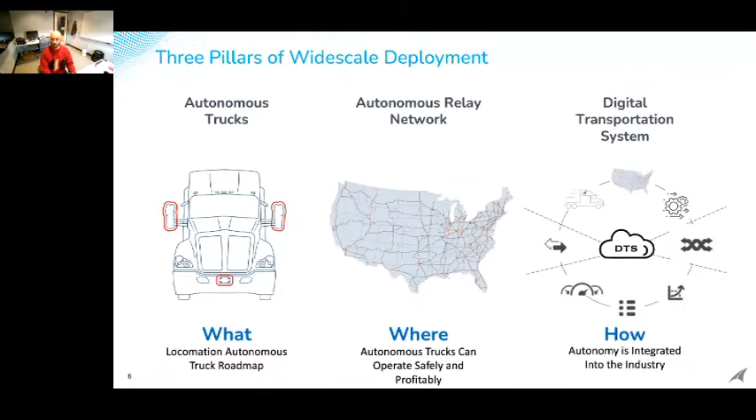Our approach to autonomy is also a little different, and very deliberately so, because we are aware that this is an incredibly difficult problem—by this I mean level 4 solo driverless operation. We decided to take a phased, step-by-step approach, starting with the human-guided autonomy concept, which has two product flavors.

The first one is what we call the autonomous relay convoy. It's a two-truck, two-driver concept, and the drivers in the trucks conveniently and seamlessly handle peripheral problems like pre-trip inspections, paperwork, securing the loads, and driving through surface streets and urban segments, which are the most sophisticated segments for an autonomy solution.

Once the vehicles are on the freeway, the driver of the follower vehicle presses a button on the dash, engages autonomy, and from then on they don't have to sit in the driver's seat. They can clock out, go back to the sleeper berth, and start taking their mandated rest as their cargo keeps moving. The convoy moves in this configuration for the duration of a shift, let's say 7 or 8 hours.

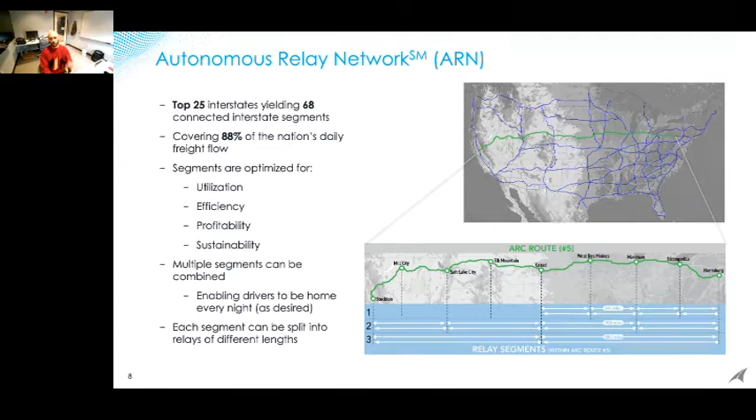In that segmentation and optimization, we looked for maximum asset utilization, maximum efficiency and profitability—not all lanes are created equal—as well as sustainability. With this flexible framework, we can combine multiple segments or divide them further to suit the use cases of different customers. This is the overall autonomous relay network framework that our autonomous vehicles will run on.

Even though I mentioned a step-by-step progression from autonomous relay convoy to drone follower to solo hub-to-hub and dock-to-dock operations, that doesn't mean we'll retire a solution once we advance phases. We won't retire the autonomous relay convoy when we switch to drone follower, or retire convoy concepts when we switch to solo driverless operation. At some point, we envision all four autonomy flavors simultaneously deployed and working throughout the nation, because each has a different use case and different application conditions.

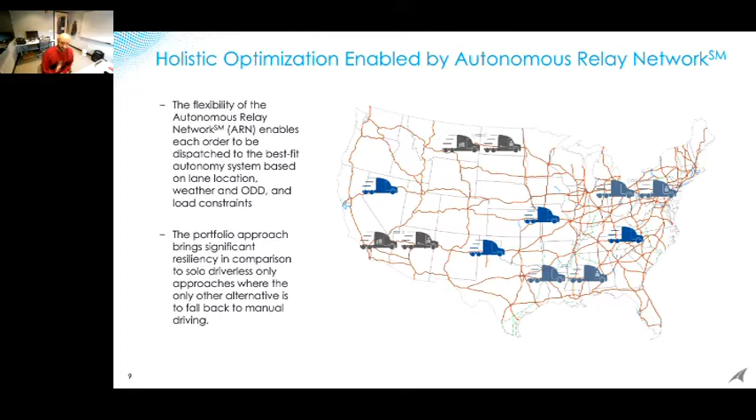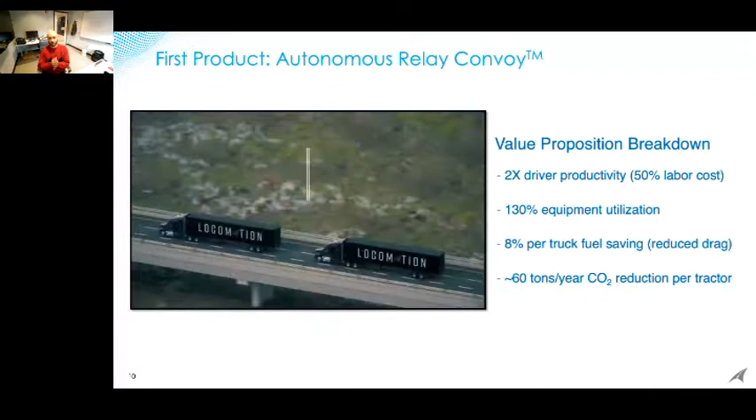With this model, we are increasing existing driver productivity by 2 times, and increasing equipment utilization by almost 130%, because currently only 30% of the time are vehicles doing something useful—otherwise they're either parked or idling, waiting for loads.

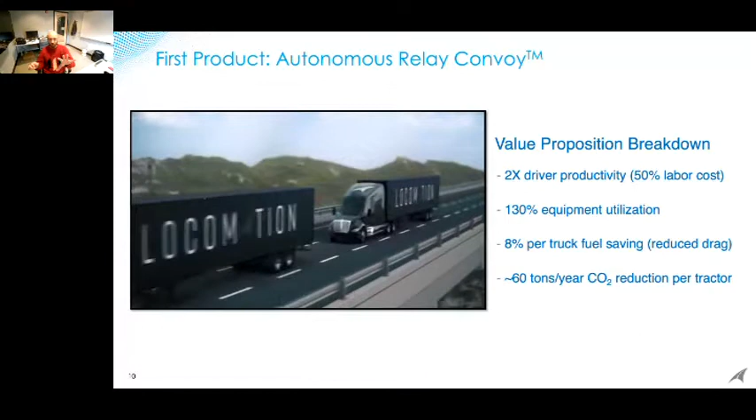So with our overall approach to load planning and route optimization and autonomous vehicle technology combined, we can increase that utilization to about 20 hours a day.

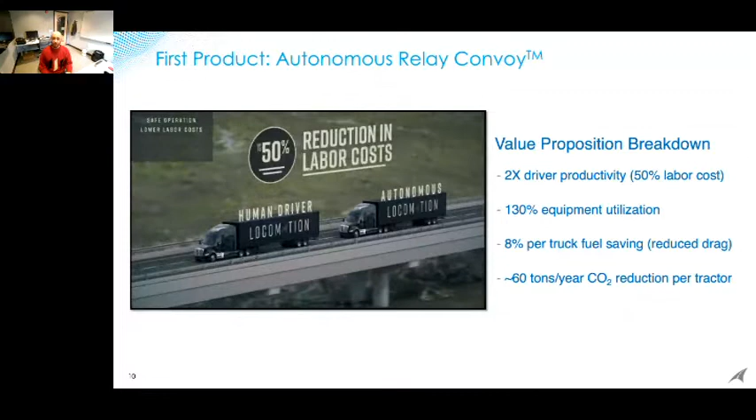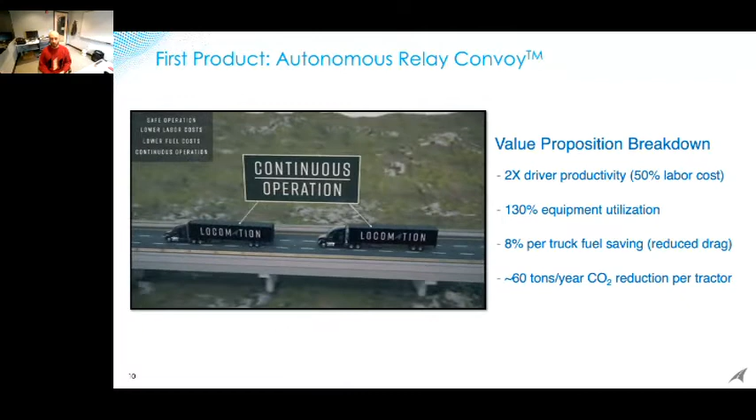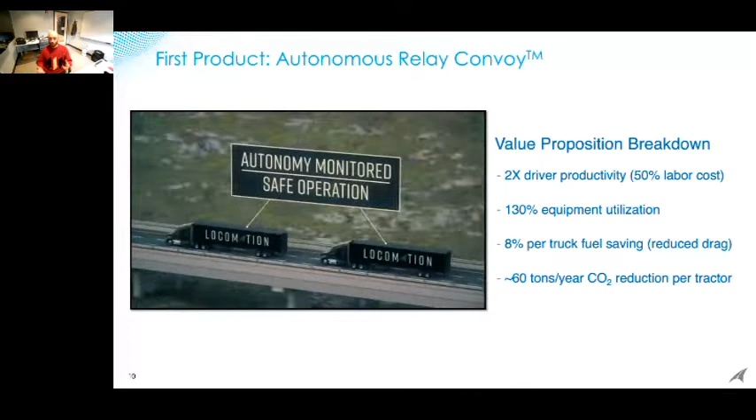And last but not least, because of the fuel savings, we are reducing the carbon footprint significantly. We anticipate each of our tractors, when operating in convoy mode, and also optimized for minimal wait time, minimal idling time, etc., will reduce carbon dioxide emission by 60 metric tons per year per tractor.

And again, from an ESG perspective, we see autonomous relay convoy as the fastest path to net zero emissions. And also, with this approach, we are still keeping humans in the loop, hence addressing the driver shortage problem, essentially utilizing the existing workforce and guiding them with the transition to future technologies, a kind of gradual transition, as well as improving their quality of life.

And also, given that we still have a human in the loop, we believe that it is a safer approach, with the superior cognitive capabilities of humans compared to robots. We will be increasing situational awareness and overall safety of our system.

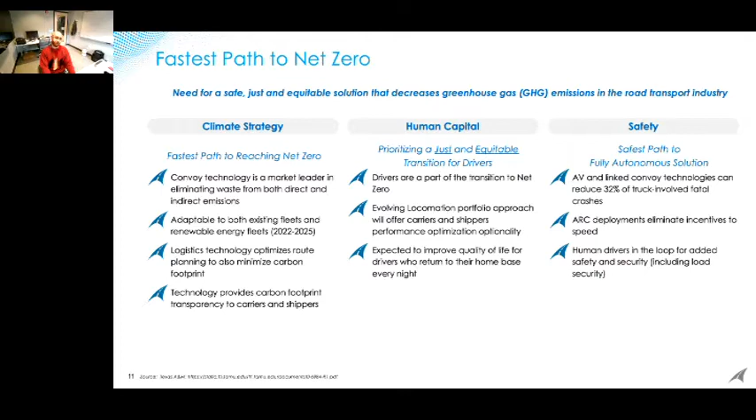So apparently this phased approach, this realistic approach, and the holistic approach to autonomy by Locomation resonated very well in the industry. And as a result, Locomation happened to be the first autonomous vehicle developer to have signed commercial contracts with 2 customers. Our first customer is Wilson Logistics, and we are looking to deploy more than 1,100 trucks, essentially retrofit more than 1,100 of their trucks with our autonomous relay convoy technology, starting deployment by the end of 2022. Our second customer is a local Pittsburgh-based carrier named PGT Trucking, committing to 1,000 trucks initially. This is super exciting, of course.

Also making us very anxious as well, because we have relatively tight timelines that we are looking at.

Of course, it takes a village to make this technology or this deployment a reality. So being aware of that, we are forming very strong partnerships and working closely with industry leaders when it comes to retrofitting our trucks with the relevant and autonomy-ready hardware.

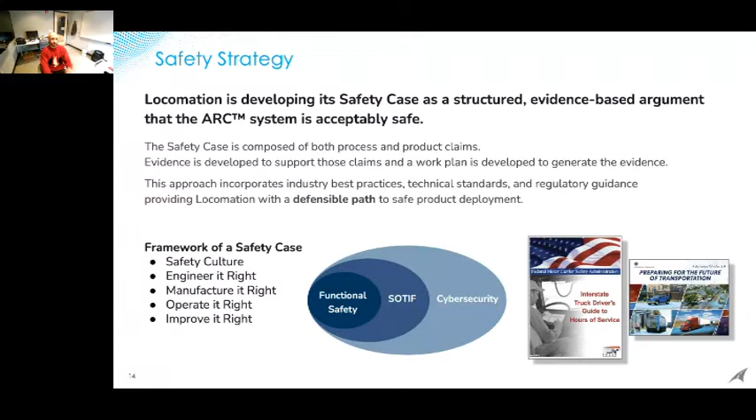For the regulatory strategy, we are working very closely with each of the 50 states, making sure that we comply with all state regulations, including all the permitting and reporting requirements.

There doesn't seem to be any federal barriers to deployment of the ARC system at the moment. We are working closely with FMCSA on that and looking to hear back from them soon. On top of that, we are also working closely with US DOT and state authorities in shaping regulations and laws applicable to commercial deployment of this technology.

So we are engaged in various initiatives like the US DOT Voices Initiative, the Automated Driving System Demonstration Grants, and the 21st Century Truck Partnership Program. We also participate in educational demonstrations, like the smart belt deployment we performed from Pittsburgh to Detroit.

All these actually provide us with feedback, and provide the regulatory agencies with the necessary feedback to craft their narratives and essentially prepare the landscape for this technology.

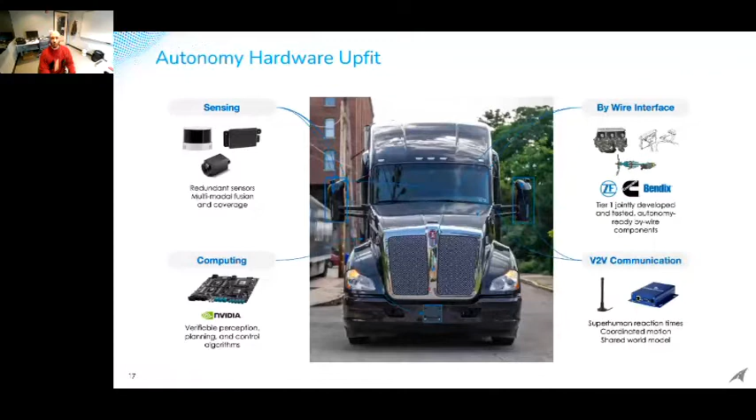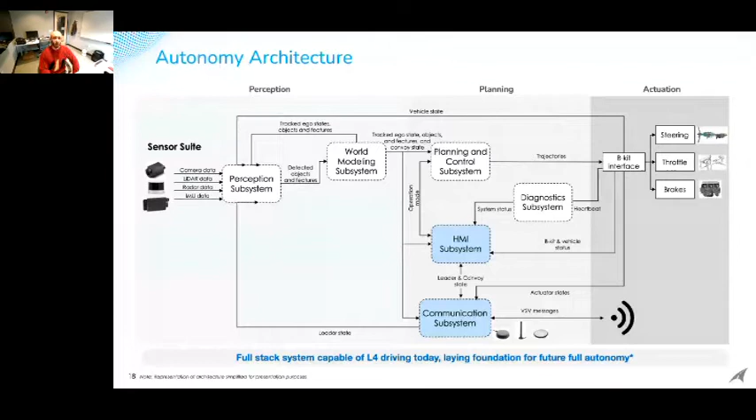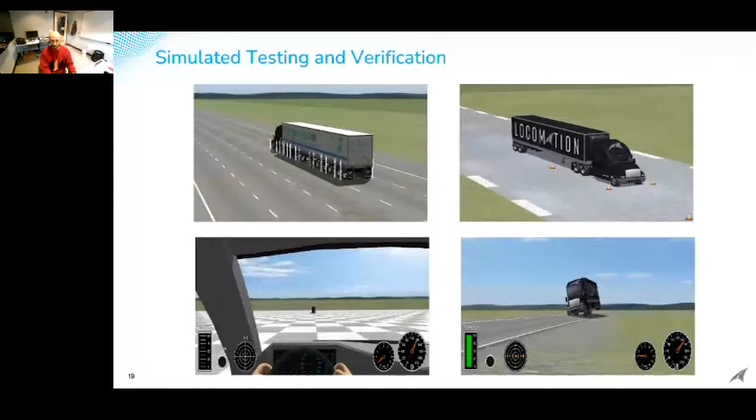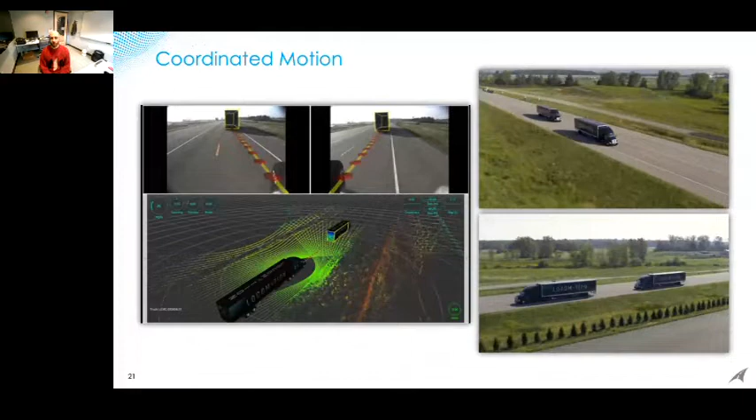On the left side, you see the introspection from the eye of the robot, how it reconstructs the path of its leader and how it stays on that path while also maintaining a tight gap between the two vehicles. If you pay attention to the cross-track error indicator in the laser point cloud view, you'll see that once the vehicle is on the path, it can maintain that path with single-digit centimeter accuracies. On the upper right, we see the drone footage of that behavior.

Essentially, the vehicles seamlessly and simultaneously change lanes back and forth. The bottom right video shows the vehicles coming to a stop simultaneously.

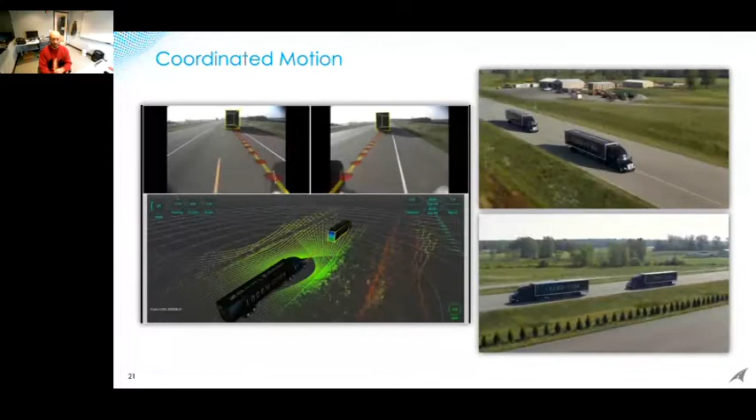That's achieved by having vehicle-to-vehicle communication between the two vehicles, so that whenever the leader truck applies brakes, even before the vehicle physically starts decelerating, the follower knows about that behavior and starts applying the same kind of deceleration profile.

It would be a stretch to say we're close to finished — we still have a long way to go in terms of our testing, but it's important to make sure we are testing in all those harsh conditions as well, not just in sunshine.

So again, we have a long way to go, but we are taking very deliberate and well-planned steps along a proper product development life cycle. With that kind of rigor, we hope to be able to deploy our systems commercially by the end of next year. Keep an eye out for our upcoming announcements on that. Thank you very much for attending this presentation. I hope it was an interesting and useful one for you.